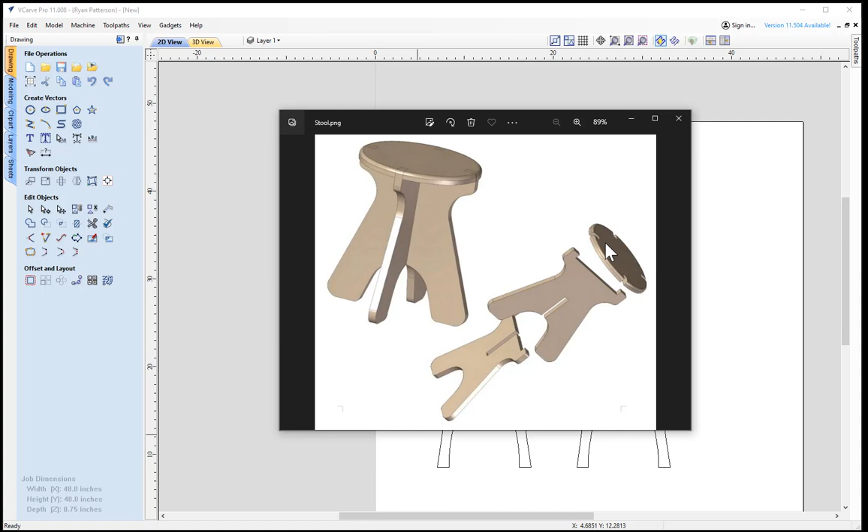This video is going to lay out this stool as we see. A few things that we need to understand are how we are making this slot fit into this slot over here, and also getting the spacing of this dados set correctly. So essentially we are creating something like we have here: this slot slides into this, and then we have some dados and notches on the top side to fit into the top base of the stool, table, or whatever it is that you are going to make use of this for.

So to create this, I'm going to start in with VCarve Pro, starting up a new job. I'm going to go ahead and create a new file, entering in the X, the Y, and the material thickness.

For slot together parts to fit correctly, we do need to know exactly what the thickness of that material is. So 3/4 inch plywood may not actually be 3/4, it may be 0.74. In that case, we are going to change the material thickness down to 0.74, or whatever your material thickness actually measures. The Z0 position gives you the option for material surface or machine bed.

Depending on what type of operations you do will depend on what type of zeroing you do. Typically I zero to the machine bed. Most of my cutting is not depth critical, meaning a dado depth or a slot and how deep I'm going into the material is not as important as how deep through the material I am cutting. So I don't like to cut too deep into my material bed or table surface. By setting Z0 to the machine bed, I'm able to more easily control how deep into the table surface I'm going to go. That allows for a little bit of fluctuation in the material thickness itself.

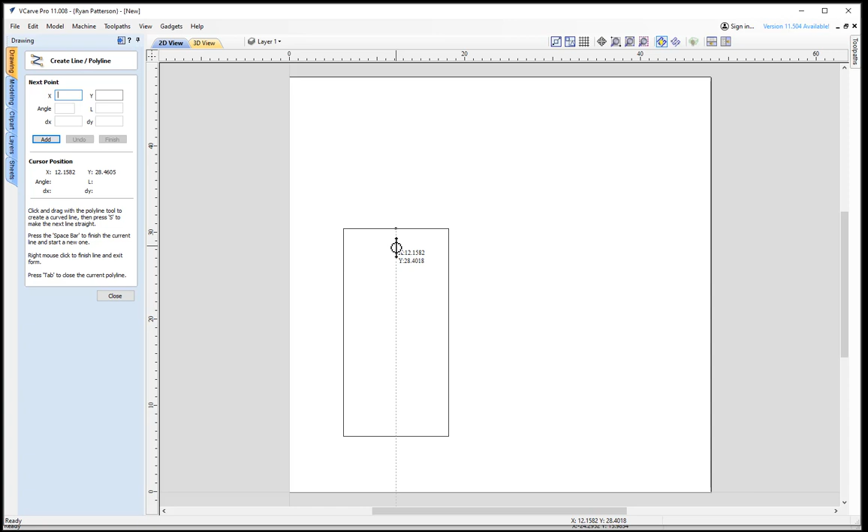Closing the rectangle tool, I'm now going to sketch out a line. You could also use guidelines for this, but I like to use sketch lines for helping with layout. So I'm going to snap to the midpoint on the top, drag down, and snap to the midpoint on the bottom. Right-clicking will end the line segment tool.

I will now create an ellipse, or circle, or something that is going to create the little design aspect of it. Again, just jumping back over to the completed design, I'm going to sketch out an ellipse, circle, or whatever shape you would like this shape to be. To do that, I'm going to use the Draw Ellipse tool, snapping again to the midpoint or the intersection, dragging out an ellipse to the size that I think is going to fit the design I'm looking for. I'm going to do the same thing across the bottom.

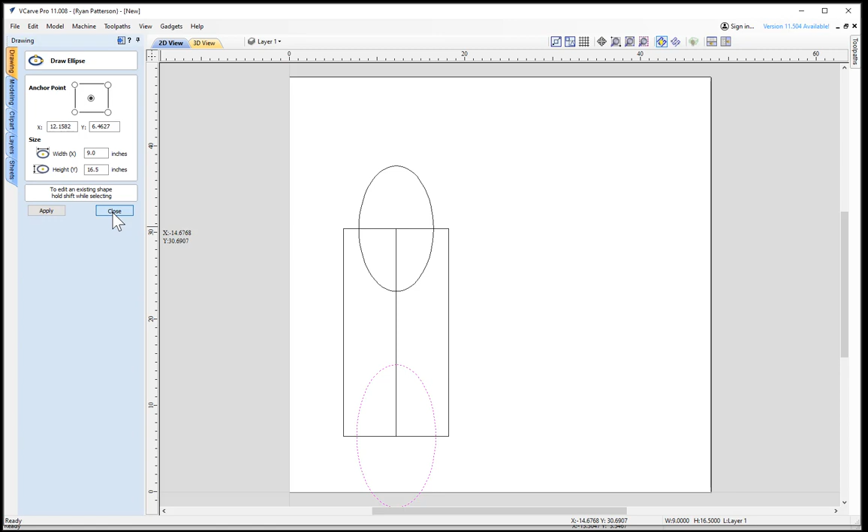We'll now close the ellipse tool, and I want to add a little bit of shape to the outside of this. To do so, we're going to use node editing, selecting that rectangle, typing the letter N for node editing shortcut keyboard, or coming over to edit objects and selecting the node editing mode. Once we select node editing mode, we're able to see the individual nodes, and we also get a clear node in the center. I want to transform this line segment into a Bezier curve.

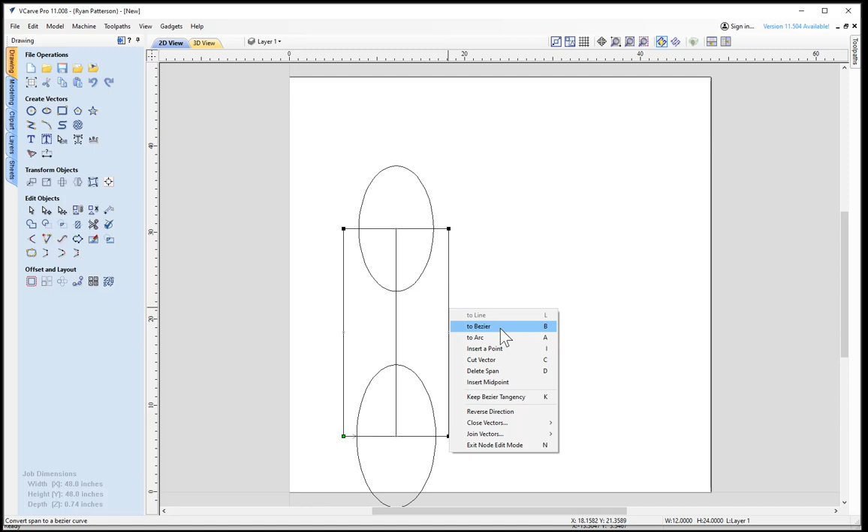So when I hover over top of that line, I get a little symbol, the tilde symbol, that says if I right click, I'm going to get some options. Anytime you right click, start paying attention and understanding that these are shortcuts. So rather than right clicking, if I just hover over the line span and type the letter B, that creates the transform to a Bezier curve. Now this has given me two control points to allow us to stretch and move this shape around. We could shape it however we like to see what the profile of this stool would likely be.

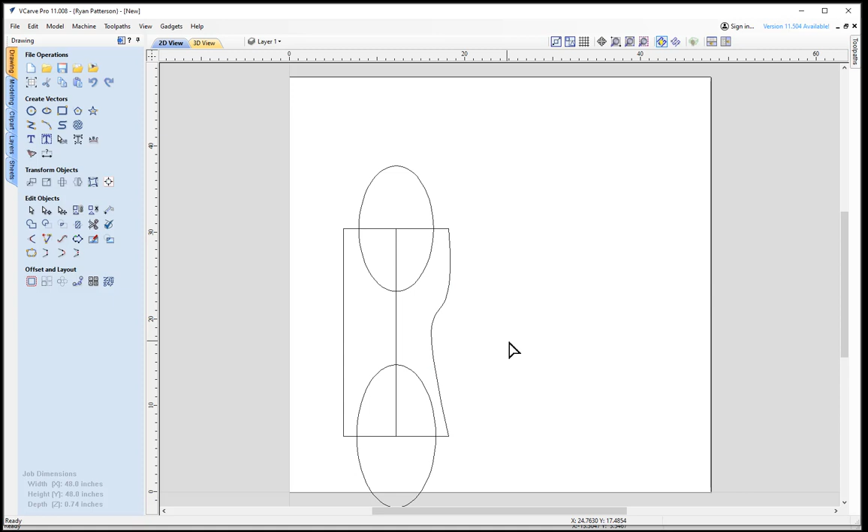Once you have that completed, that is the side profile. We will now use the scissors, or the trim tool, to remove half of our stool away, which we will then use the mirror tool to create the identical mirror of the right side to the left side.

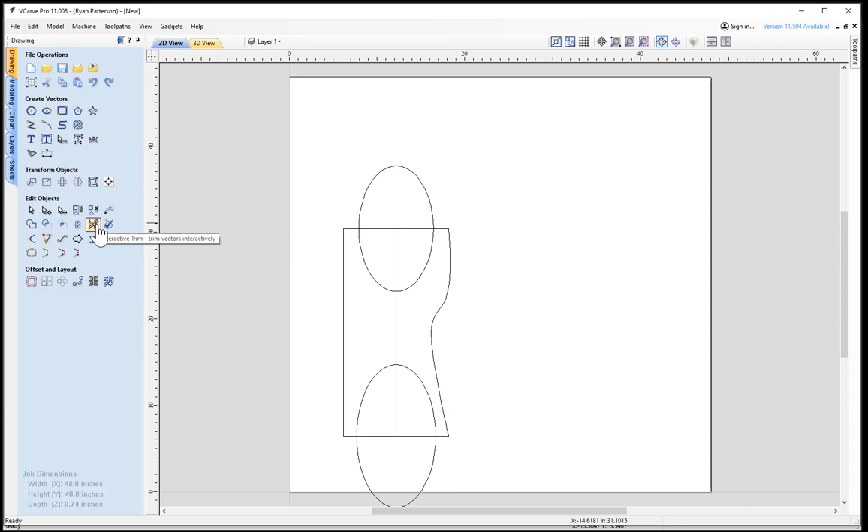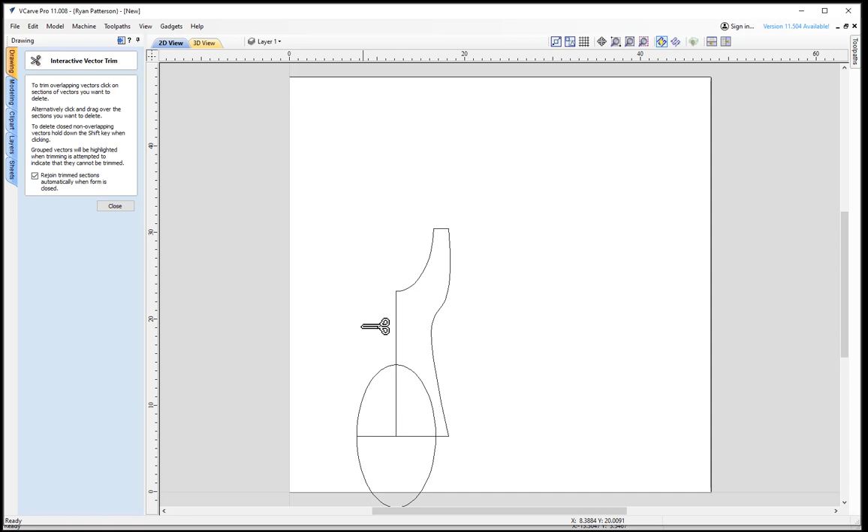Coming over to Edit Objects, using the interactive trim, now gives us scissors. When you bring those scissors over top of that line segment, you see the scissors open, and then you click, it trims that away. You could also click and hold the left mouse button down, and as you drag over top of the parts, it automatically trims those parts away.

Now we have half of the side of the stool. I do want to mirror this, but before I mirror it, I don't want to have a duplicate vector, and I still need to have the midpoint line here that we will later offset.

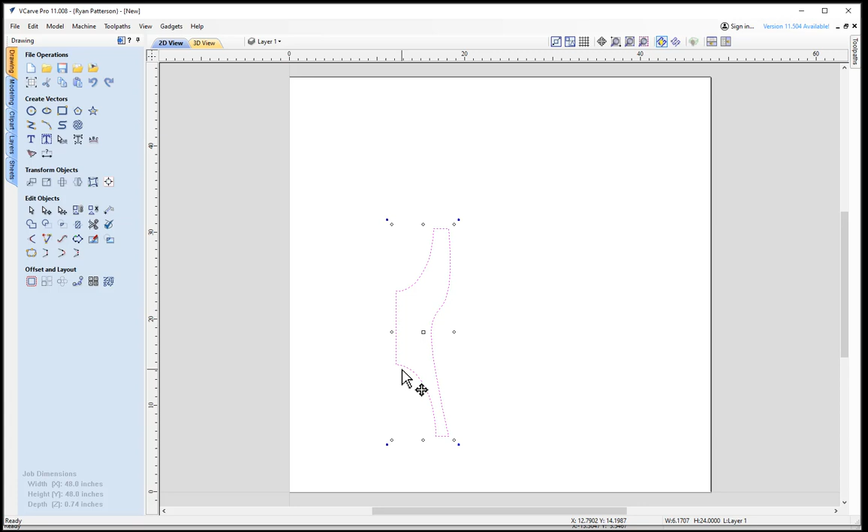So I'm first going to, before mirroring, break this apart again using node editing. This time I am just typing the letter N on the keyboard rather than coming over to Edit Objects and selecting the node editing tool. Going to right click over the node editing and select Cut Vector.

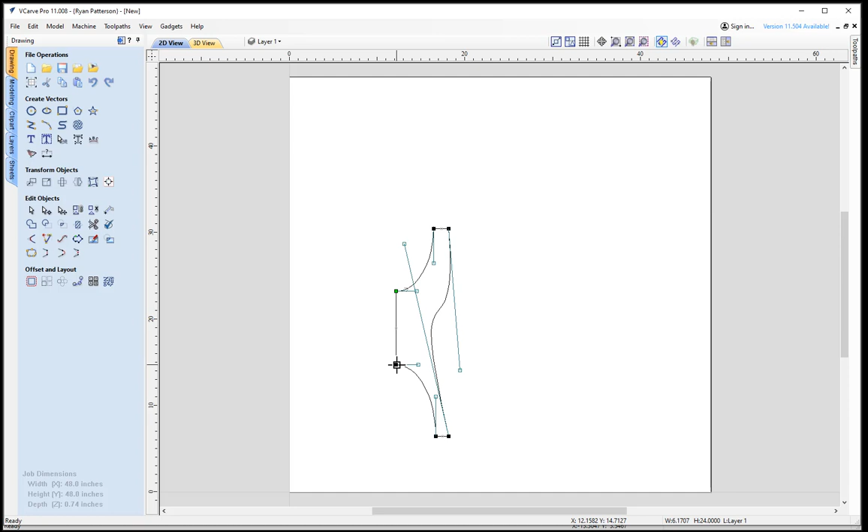While I'm here, I'm going to make note of that letter C. That is a shortcut. Rather than right clicking when hovering over this node, I'm just going to type the letter C. That separates and cuts that vector off of the rest of the shape. We'll now select half of this and use Transform Objects Mirror.

Going to mirror it to the left. Holding the Shift key down, selecting the other half, we can now join this together. Shortcut command is J for join, or coming over and clicking the Object button for join vectors. It tells us there are two open vectors, and we will join that and create one closed shape. We see that that is now a closed shape.

Now to create the slot that we want on this, we want to offset this line a total of 3/4 of an inch. Coming over to Offset Layout, the bottom left icon is for offset. With that vector selected, we're going to set the option to offset in both directions.

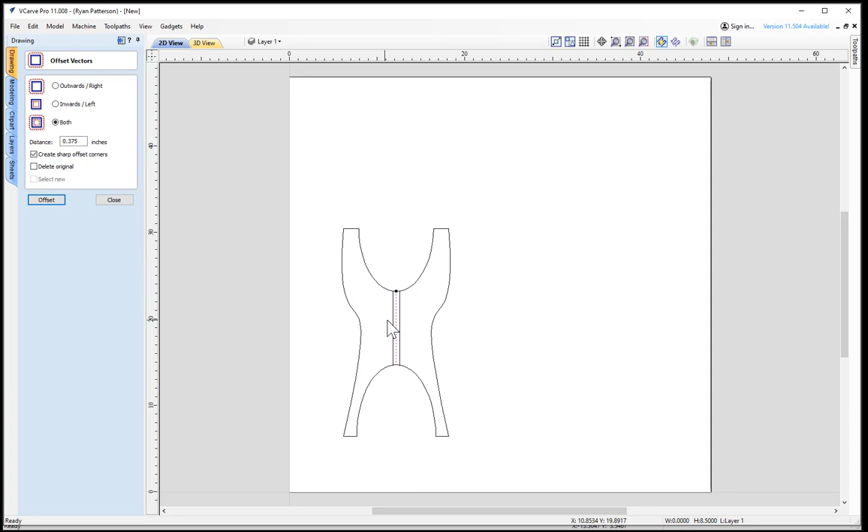Our material thickness is 0.74 inches, and offsetting a distance of half of that plus a little bit more allows for an easier slide-together fit. I'm going to offset both directions by 0.375, or 3/8 of an inch. Going ahead and clicking offset now gives us two offsetted lines. Closing the offset tool.

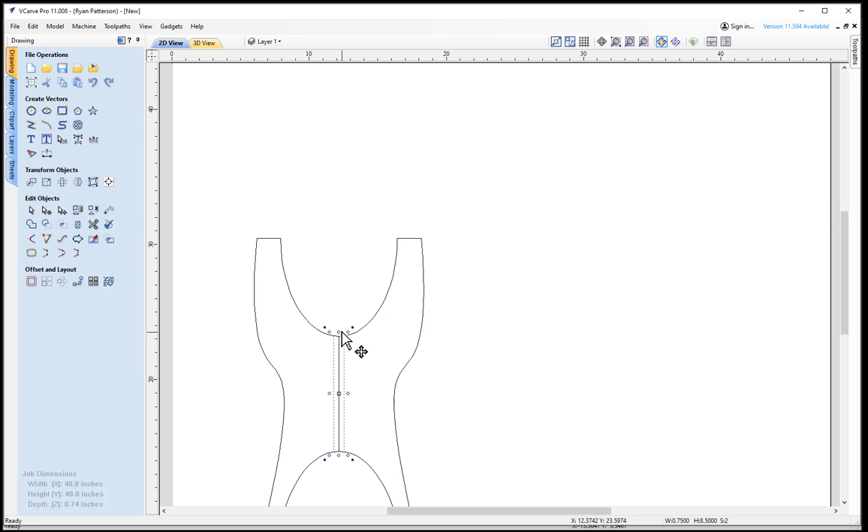With that being offset, we're later going to trim these little bits away, but with this being a radius here, those offset lines are offset directly to the right, so we need to extend those lines out. Selecting, holding the Shift key down, selecting both of those lines, selecting once more gives us our control points. Holding the Shift key down allows it to stretch and grow in both directions. You see the bottom section of parallel lines are also extending out past the same that I am extending it up from the top.

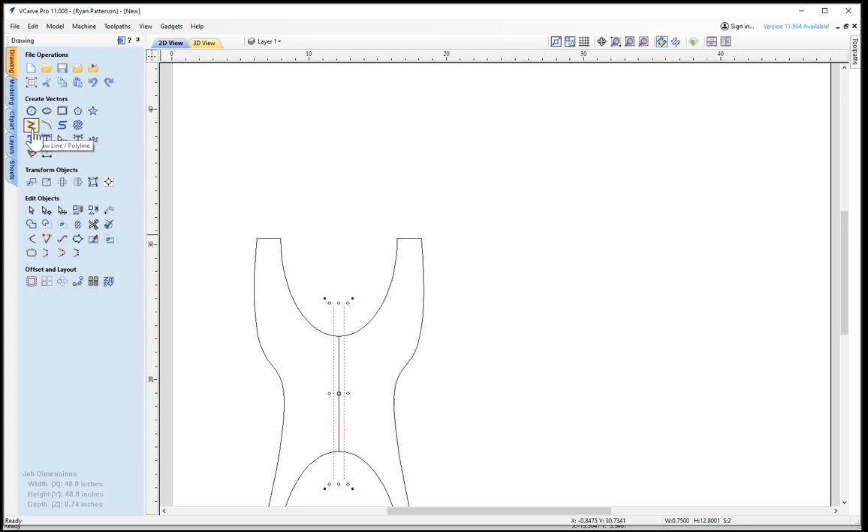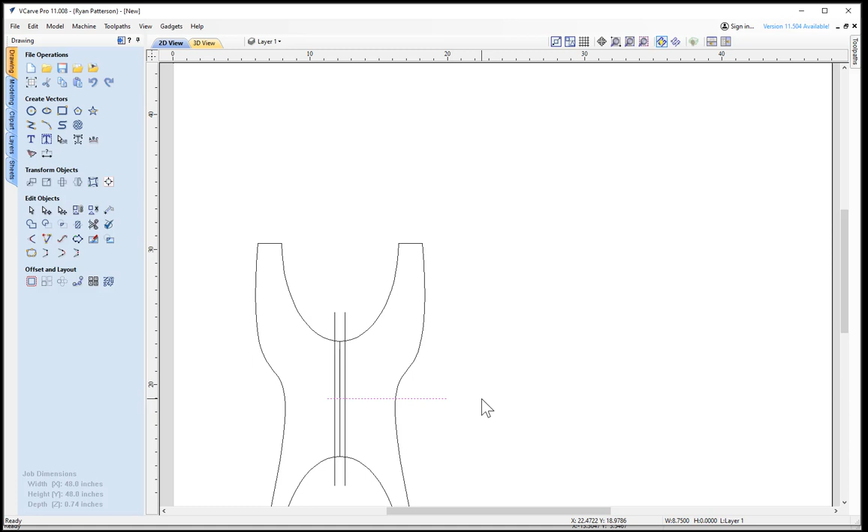With those extended, I'm now going to draw another polyline from the midpoint of this line, center point right here. This is going to be the split of our slots. Once that is drawn, I right click to end that line tool, and just use the left arrow key to shift that line segment over so it intersects all of that.

Now it is time to make a duplicate copy of this so we could trim the objects away to make a top side and a bottom side so both slots mesh up with one another. It's going to do a sweep select, and there is a difference for sweep selecting from left to right or from right to left. Going from right to left, everything intersecting the window being dragged out is selected. Going from left to right, only what is entirely inside of that window will be selected.

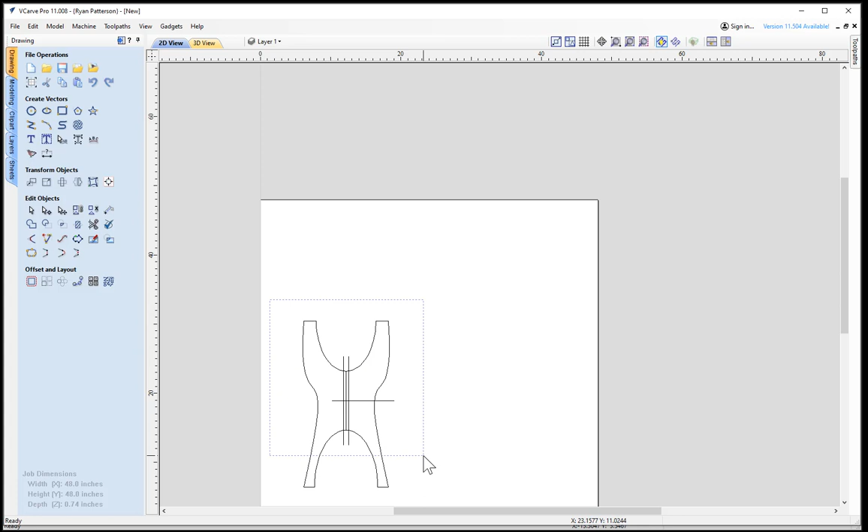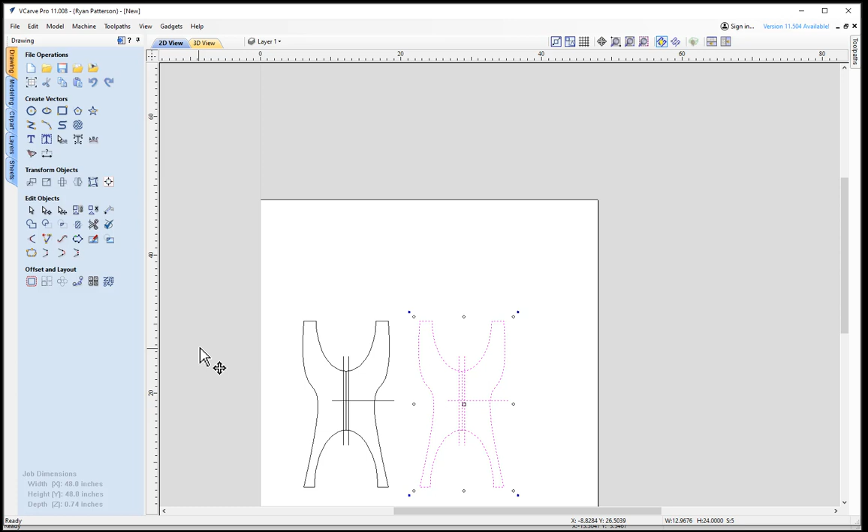So with all those selected, I'm going to select it one more time to get our control points to be able to move this around. As I am moving this around, I'm going to hold the control key down and just move it over to the right. By holding the control key down, that is going to make a duplicate copy of what we were just dragging around. With our duplicate copy set here, we no longer need this midpoint. I suppose I could have removed that prior to making a copy of it, and we are now ready to use the scissors to trim these objects away.

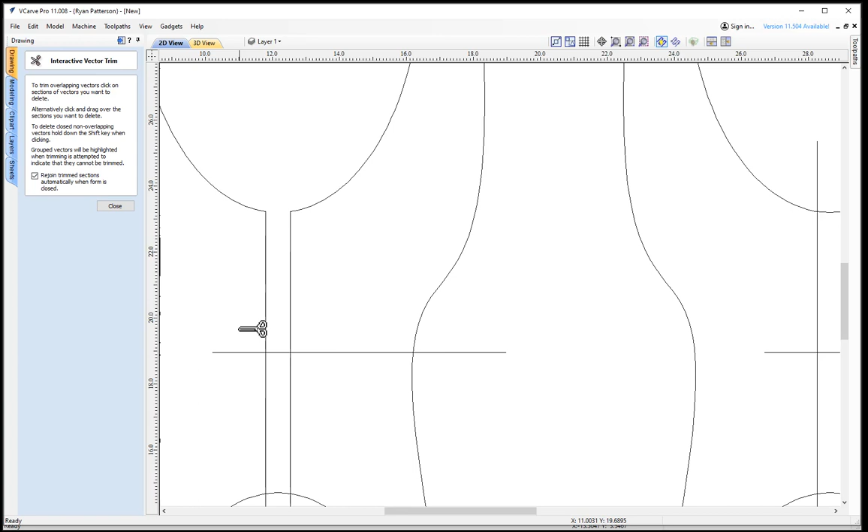So on the left object, I'm going to trim all of the sections from the top side. Then on the object on the right, I'm going to remove everything on the bottom side. Again, holding the scissors down and just dragging over. We have now created a slot on the top and a slot on the bottom that will slide together after being cut.

We do have to make a modification to allow for the radius of the cutter. But before I do that, there are some bits that are not needed. It is always good habit to remove those bits as you progress on. If not removed now, you'll forget about them later, and they may end up causing you some hassle when you go to toolpath or cut.

So right now we have, in a perfect world, if we were able to cut sharp inside corners with a round radius bit, this would work. But we do need to allow for the radius of the cutter to come in these turns.

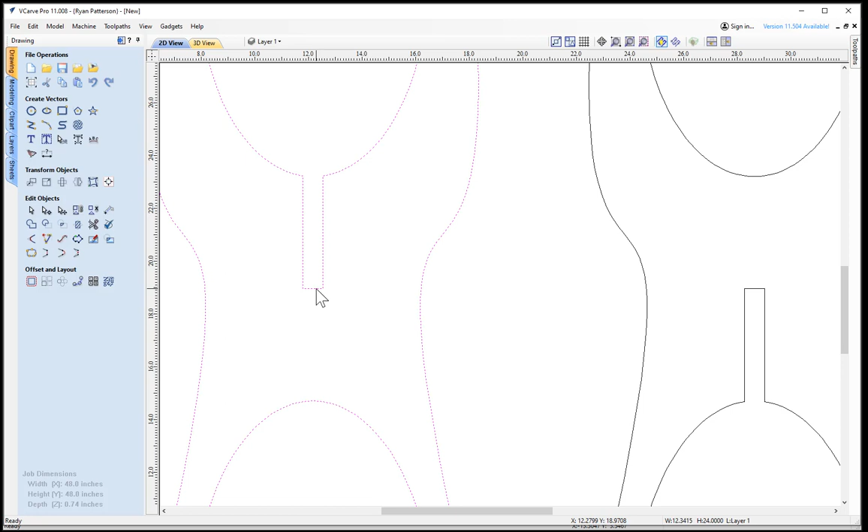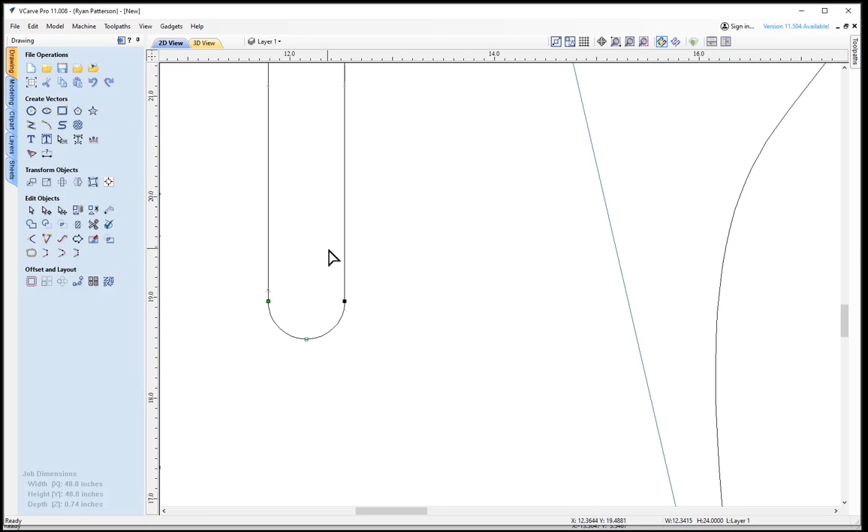We could use the dog bone or T-bone option, but for this case, I'm just going to use node editing again, typing the letter N, and remember we talked about right-clicking and converting and knowing what those shortcuts are. So I'm going to right-click and know that the shortcut is the letter A. I'm going to drag that arc down. That now allows the cutter to more smoothly transition around that slot. And remembering that shortcut letter A, just hover over top of that line span and type the letter A, so that converts that line span to an arc.

We now have two pieces that will slide and slot together. The next object that we need to draw is the object for the top, and add a couple dados for these bits here to slide into.

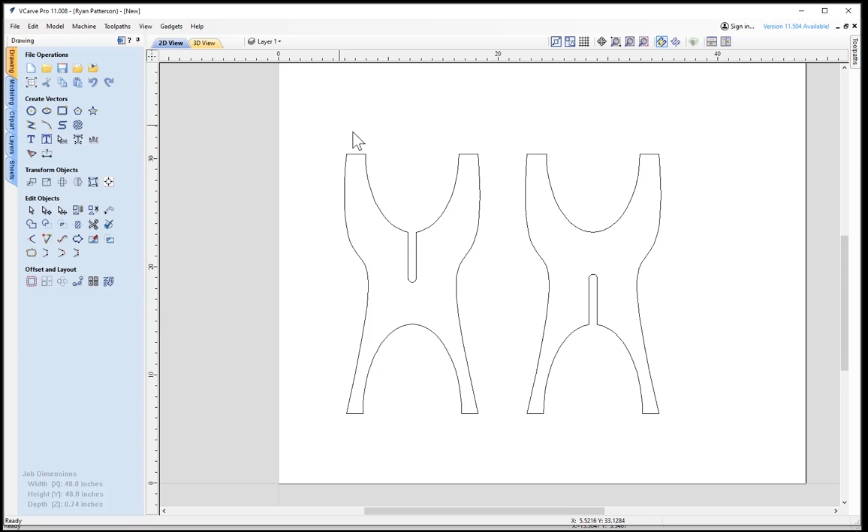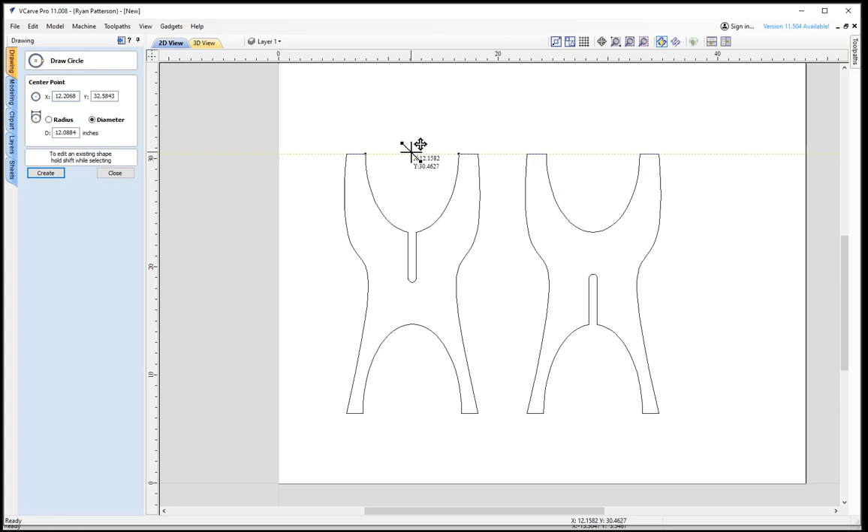To create that top, I'm going to use draw circle, and I want to have this circle drawn at the midpoint of this opening. So if we snap over to the left side, with that snap still being there, snapping to the right side of that, we get this line here that we will then get a snap to midpoint. So we're going to drag that circle out bigger than what the two legs are there, or wings of our sides, closing the draw circle, coming in to create a rectangle.

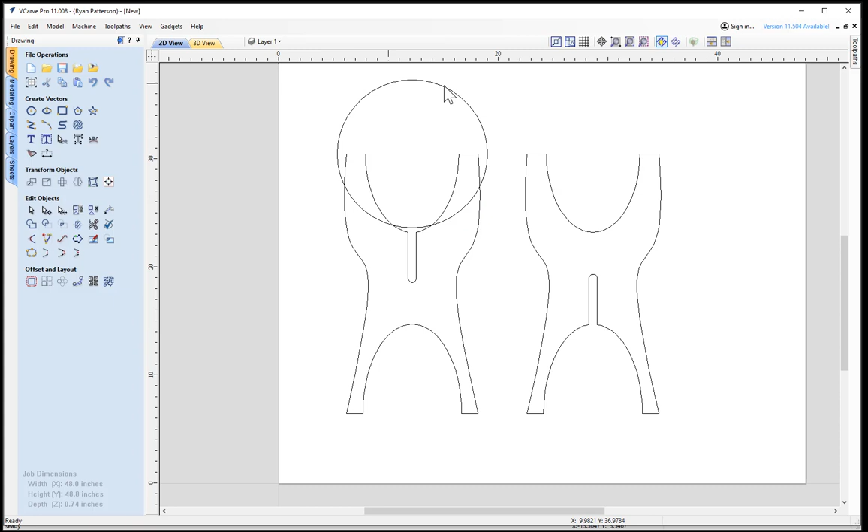But before I do that, I am going to clear all selections by just clicking out in white space. That removes that circle from its selection. Coming over to draw rectangle, going to use the snap to snap this rectangle from the left side of the leg off to the right side, which is giving us an infinitely small rectangle in the Y direction. We need to make this a little bit bigger than our 0.74 material, so let's just call that 0.75, then apply.

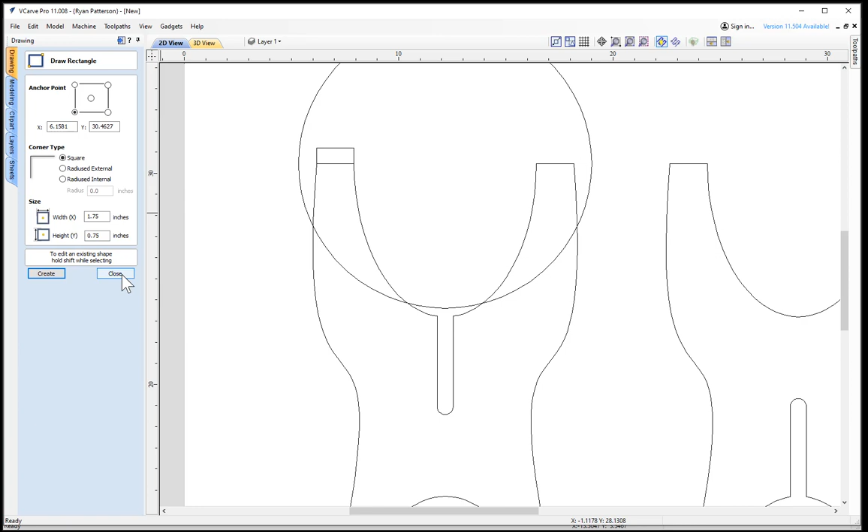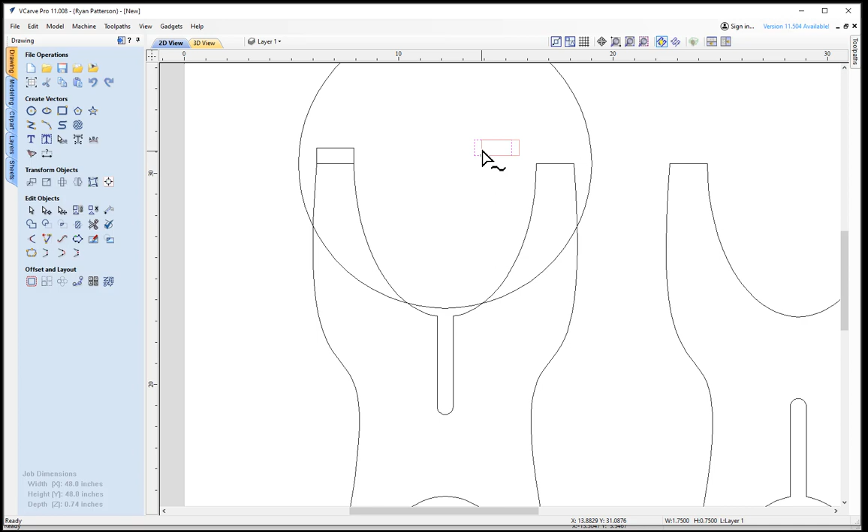That is going to represent a dado or a pocketing out cut that we will do that will allow these to fit inside. I need to have this same rectangle copied off to the right side. So holding the control key down as I drag makes a copy of that, then selecting and clicking the endpoint from the lower left of that rectangle and snapping to the point of the opposite side. We now have the dados that can be cut for the slots.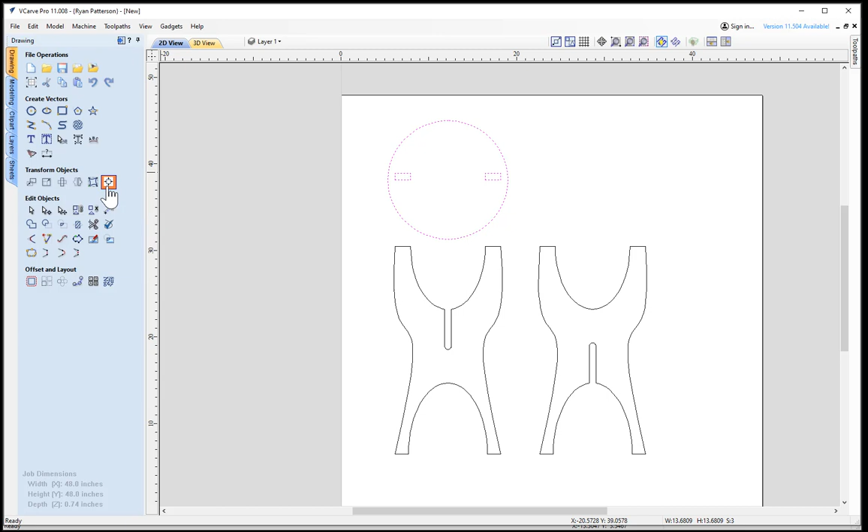I'm going to now move our circle up out of the way and off of our material. We do want to ensure that these two rectangles are centered vertically on our circle. So to do so, I'm going to select the two rectangles, holding the Shift key down and selecting the circle. Remember, when using the Transform Object Centering tool, it centers all selected objects to the last selected object. So with that being done in that order, I'm going to use the center horizontal or vertical, and you see that they got shifted down just a little bit.

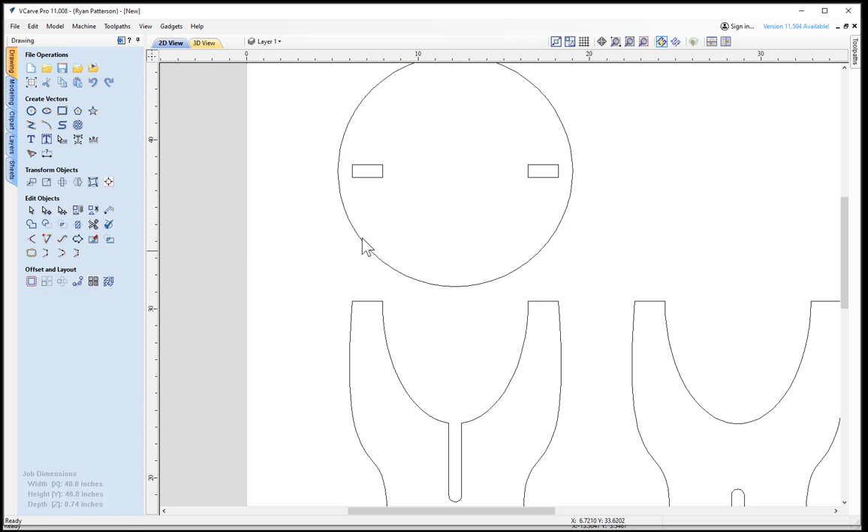We made the compensation on our slots with a radius. We do need to have the same compensation for the radius internal cuts for the square outside cuts to fit inside. This time we will use the dog bone feature found under the fillet tool. I'm going to be cutting this out with a 1/4 inch cutter, so the radius is going to be 0.125, or 1/8 of an inch. And if we were unsure of the decimal equivalent of 1/8 inch, text boxes within VCarve Pro could have math done in them. So I could type in 1/8, and when I hit the equals symbol, it will equate that equation for us.

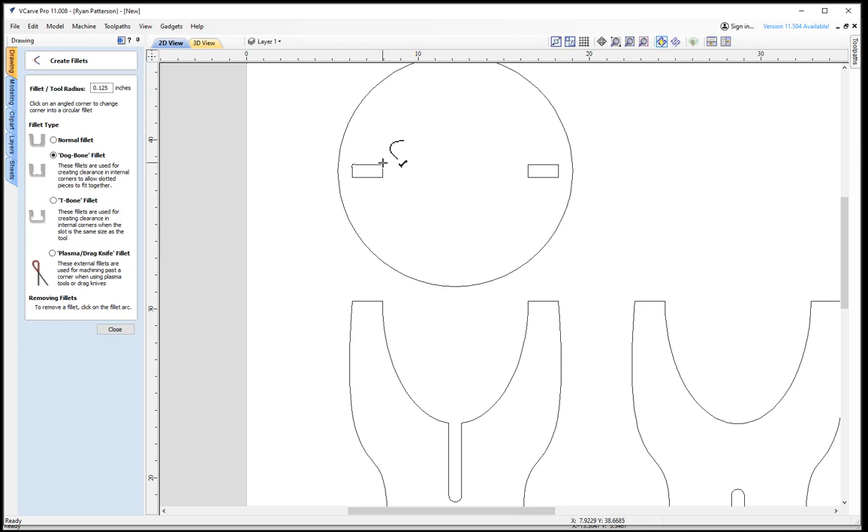Going to set the option for dog bone, come over and click on each of the corners. We could see that we are getting a dog bone looking type effect that is allowing that cutter to cut onto the outside and allowing us to be able to fit a square corner or a square peg into a round hole.

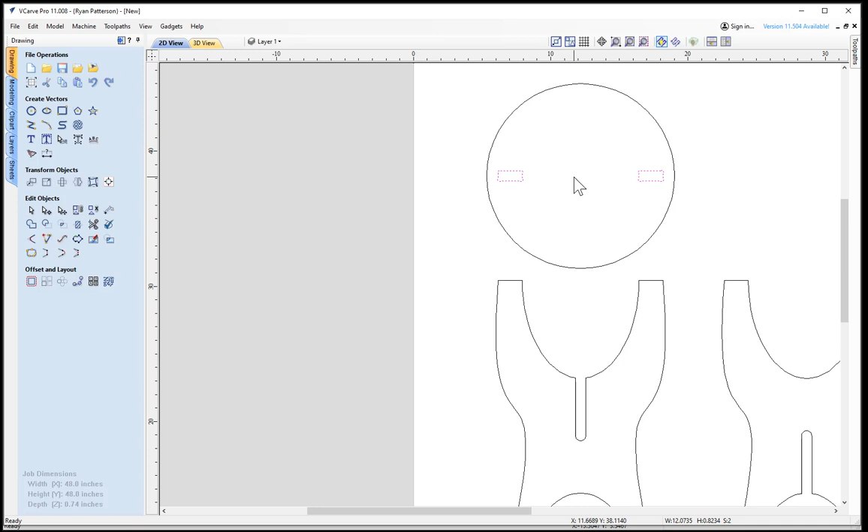With that done, we need to now rotate these two rectangles 90 degrees to allow the opposite leg to fit in. So before we just rotate, I'm going to select both of those rectangles with the sweep selection, doing a Control-C to copy those objects to the clipboard, then typing the letter R or coming over to the Transform Objects and selecting Rotate. Going to rotate 90 degrees, selecting Apply, then closing, and we'll then do a Control-V to paste back in those original rectangles after rotating.

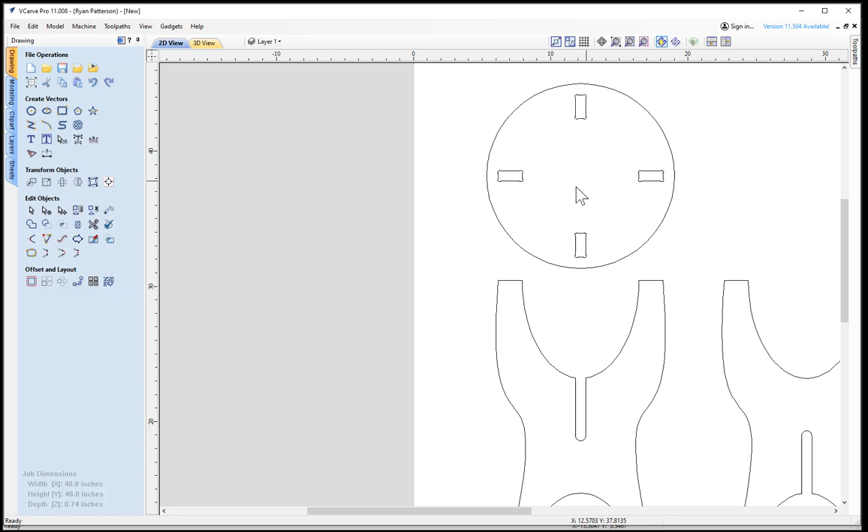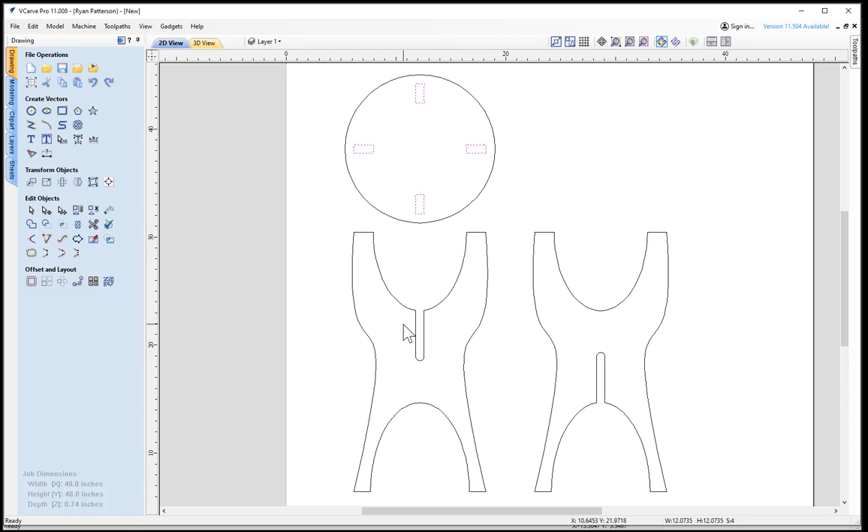We now have the objects all set and ready to create your toolpaths. I would profile the outside of these objects here, profile cut to the outside, then depending on what diameter cutter you're doing, in the case that I have set this up, I am using a 1/4 inch cutter, and we would need to pocket these out. So I'd pocket these out to maybe a depth of 3/8 of an inch, half the thickness of the material. That will allow, after these two are slotted together, to fit right into those slots.

So that is a quick and easy way to get a slot together stool. These same methods could be used to create slot together tables or slot together any type of shapes. Hopefully this was some use for you. Have a good day.